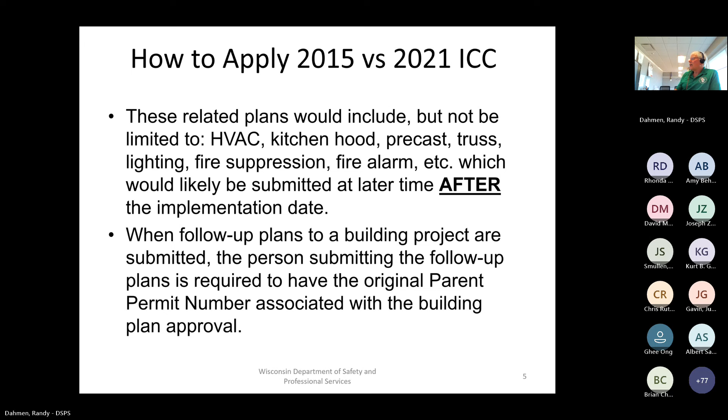I expect to see not only 1 hour, 2 hour, 3 hour, 4 hour fire ratings clearly identified, but also called out as fire partitions, fire barriers, and/or fire walls. Both need to be addressed. I can't tell you the number of plans I get that only give me a fire rated door schedule, and I'm supposed to guess the rest. You have to remember the HVAC guys have to use your plans, and they need to know how to penetrate the wall. When you don't tell them if it's a fire partition, a fire barrier, or fire wall, they don't know how to address that opening with their duct penetration. So make sure you've got complete plans.

So if the building plans were submitted prior to the implementation date for, say, a shell or spec building, and the building was completed - here's our box, it's just an empty box, got 4 walls and a ceiling, nothing in it, no tenant - and then at a later time, the building alteration plans are submitted to address the tenant build out, maybe 1 tenant, maybe 2 tenants, but after completion of the building, then the code applicable to that alteration is based on when the building alteration plans are received, not when the shell or spec building plans were submitted.

And again, when those tenant spaces are submitted, whenever that gets initiated with the building plan, all the ensuing HVAC, sprinkler, fire alarm, etc. plans would be based on the date of the building alteration plan when it was received. Note it's not when it was approved - I'll say again, it is not based on when the plan is approved, it's based on when it is received in its completion by the department. Don't give us paper napkins with doodles that you made a PDF on to get your foot in the door, because we're not going to accept that. We need complete plans submitted to the department, and when there's complete plans, that's when we'll identify it as acceptable under the code in which it was submitted.

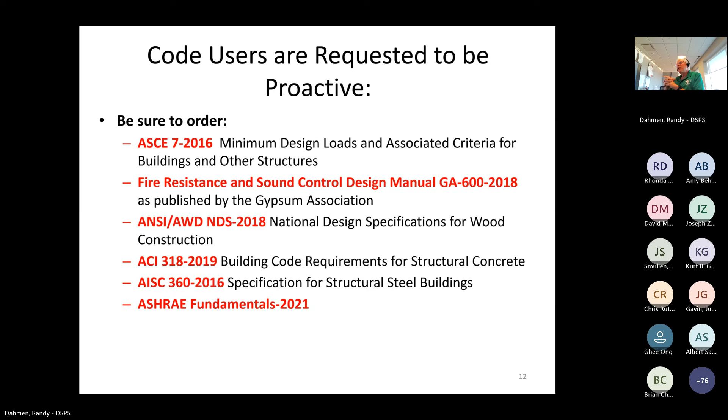Licenses. As part of this code adoption, we've incorporated new licenses, specifically to certify individuals for fire detection, prevention, and suppression inspection. Now, they're not a complete commercial building inspector, but rather they're only looking at three very specific areas: fire detection, prevention, and suppression inspector.

Now, these licenses, for the most part, will be ascertained by local fire officials who work for various fire departments, whether they're permanent or voluntary workers. As many of you may or may not know, the fire code, SPS Chapter 314, requires that yearly fire inspections take place in commercial buildings. This is where the fire department gets into buildings and verifies that the exit signs are working, that the fire suppression equipment has been properly checked along with the records that go with that, and that there hasn't been damage to the fire alarm system, etc.

But now there is a license to give them the ability to write orders on fire detection, prevention, and suppression systems, just like that of a commercial building inspector.

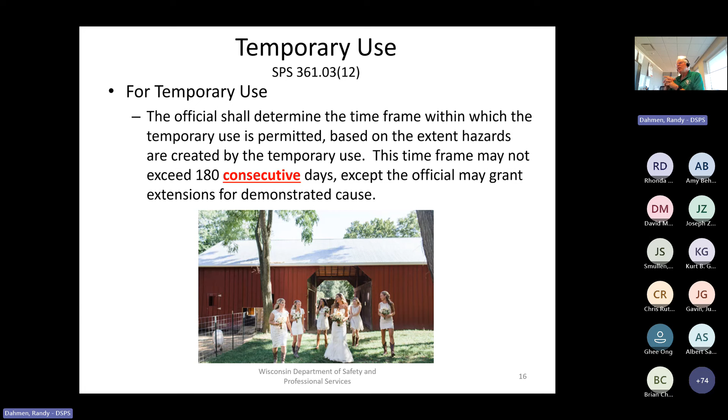So if you go to the building code, let's just say high piled combustible storage, that's IBC 413, and I know it's going to direct you to the International Fire Code. Before I go to the Fire Code and apply it, I go to the Fire Code, find out what chapters involve the application of high pile combustible storage.

Then I come to this section, and if that code chapter in the Fire Code is listed, I apply it. If it is not, I don't.

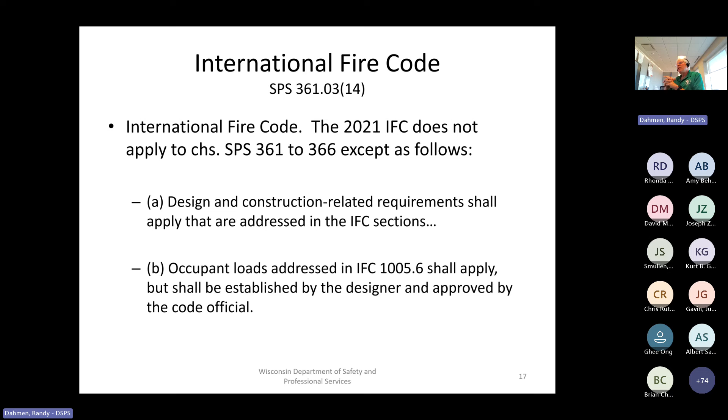We also have construction inspections and reports as addressed in the IFC, but note they may be performed or compiled by any qualified agency rather than by a special inspector. For instance, we don't have special licenses yet in the state of Wisconsin. So if you can show your competence in verification of concrete pour via slump tests and your abilities in having the testing equipment for welds and steel verification, you could be a viable agency or representative for performing construction inspections and reports. We'll have more on that later. The key here is that it doesn't necessarily have to have a license per se, but you do need to demonstrate competence and qualification.

The fourth item is use and operation provisions for the building. If the code sections or chapter sections of the IFC are listed, then you apply those sections as appropriate for your building design. There are global deletions throughout the code here as identified under parens 15 and G.

In general, I want to make clear the state of Wisconsin does not require occupancy permits. You can get into a state building or a county building and not have an occupancy permit per se. We don't issue them. On the other hand, local municipalities may choose by local ordinance to require the future tenant to obtain a certificate of occupancy. If that's part of their local ordinance, make sure you follow that and don't get in conflict with the locals.

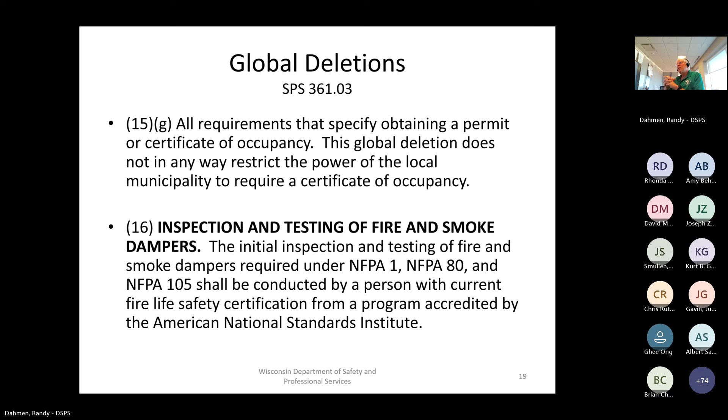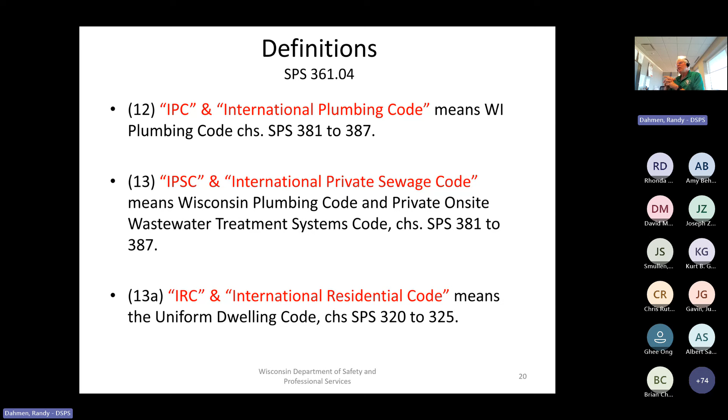Now there's some new definitions. Modular commercial building element means any modular commercial building, modular multifamily dwelling, modular commercial building system, modular multifamily dwelling system, and on it goes.

Formerly, the state of Wisconsin had two separate codes, the way the legislature had created their approvals. One was for commercial buildings and one was for multifamily dwellings. They were two completely independent codes. Many of you may remember the old Chapter 66, ILHR Chapter 66 or COM 66. The legislature combined those two, so now it's under one hat, and thus now we're just calling it a commercial building. And in updating the language of our code, we also updated some of the requirements, and we'll get into that shortly.

As I implied earlier, multifamily dwelling has a legislative definition, and thus we have to use their definition, not that of the International Building Code.

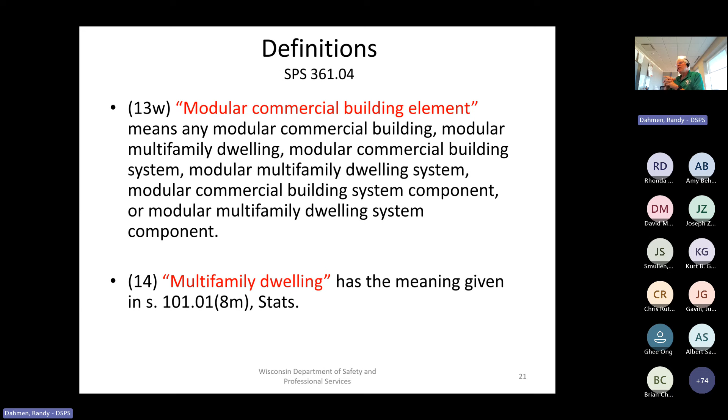Now, some changes were made to the plan review approval. They created a new exemption for single-story buildings and structures of less than 1,000 square feet located on individual parcels or lease sites at Wisconsin State Fair Park. This reference to Wisconsin State Fair Park is Milwaukee and Milwaukee only.

Permission to start, a PTS, many of you are familiar with. It allows you to get started early. I'm going to expand on this because a lot of people don't seem to understand the limitations of this permission to start. It is not an allowance to start anything you want at your discretion. It is only allowed for footings and foundations, i.e. construction at grade or below. That's it. Don't send in a permit to start for HVAC system alteration on the second floor or the installation of additional windows on the first floor. That is not what a permit to start is for, and if we know about it, we'll deny it. It is only for footings and foundations.

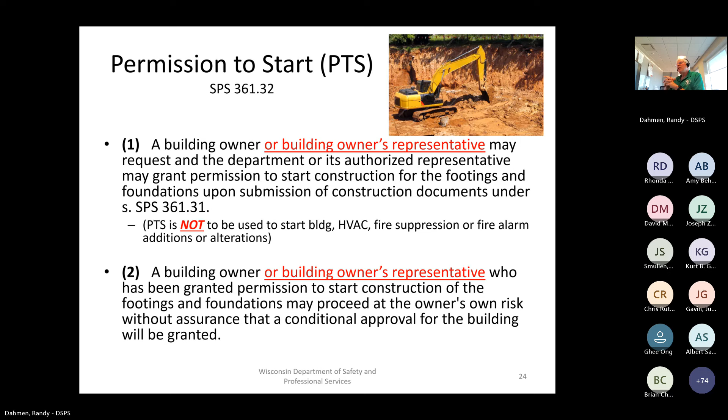This is one that I believe the design and contractor group should appreciate. We've changed the validity of an approved plan from 1 year to 2 years if it involves an alteration. So if you have an interior building alteration, you're going to move some walls, create some new rooms, spaces, conference areas, etc., that plan, instead of being good for 1 year, will be good for 2 years from the date of approval. Similarly, if you have alterations to HVAC, fire alarm, fire sprinkler, etc., you have a 2-year approval date for that alteration.

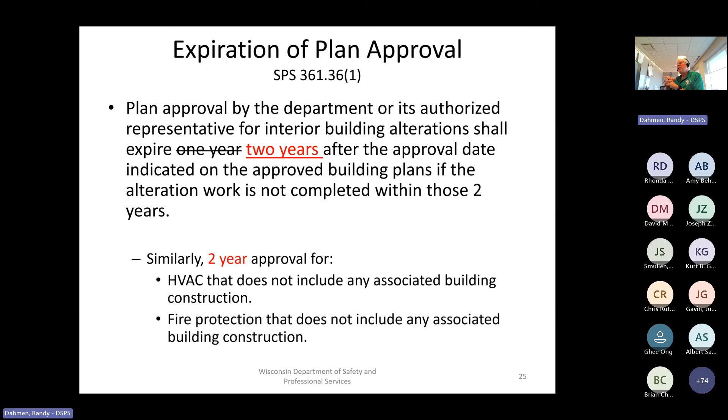Now, we talked about the modular commercial building elements and how we combine commercial buildings and multifamily and put them into one. If you're not familiar with the system, what they do, and there's a real advantage, is that they construct these modules, it looks like a box, in a factory where conditions are controlled. You don't have to worry about the wind, the rain, the snow falling, or being 20 below zero. It's built in a factory, thrown on an 18-wheeler, taken to the site. A crane lifts it up, puts it in place, and it's properly fastened. Basically, it's a modular commercial building. There's some advantages to that. Not saying that everybody has to do it - it's an option.

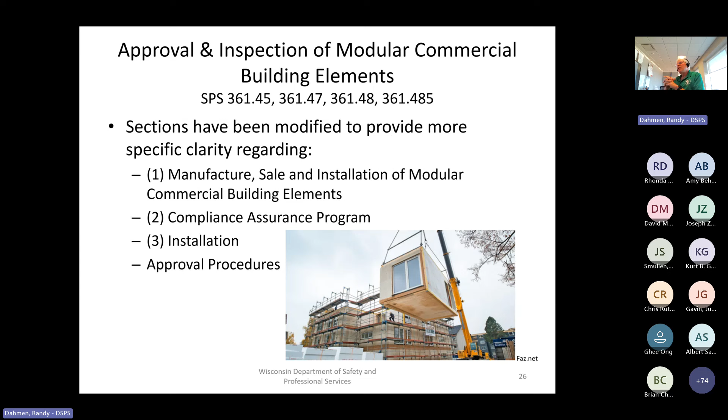And of course, when these boxes are constructed in a factory, we want to know that they're being constructed per the requirements of the code, because there's necessarily no on-site inspection by our inspector. So there are some requirements, a compliance assurance program, the manufacture, the sale, the installation, etc., that needs to be procured if this option is chosen.

Now, when we adopted the 2015 code, we incorporated the option for the design community, without a petition for variance, to use a newer version of the model codes. So in 2015, you could have used maybe the 2018, the 2021, or even the 2024 without a Wisconsin petition for variance being submitted and approved. However, you have to follow the published code as written - there are no Wisconsin amendments. If that's the choice you make, and you certainly can do that, know that there are no Wisconsin amendments that are applicable. I emphasize, Wisconsin amendments typically reduce the requirements of the code.

We clarified this situation as to what the fees would be through what is now parenthesis B, and the fees are to be subject to 302.51 for a new approval for an alternate standard, which is exempt from the petition for variance requirements. So as we go to 302.51, you'll see here's the new approval - it's an alternate standard, and thus the cost is $1,200.

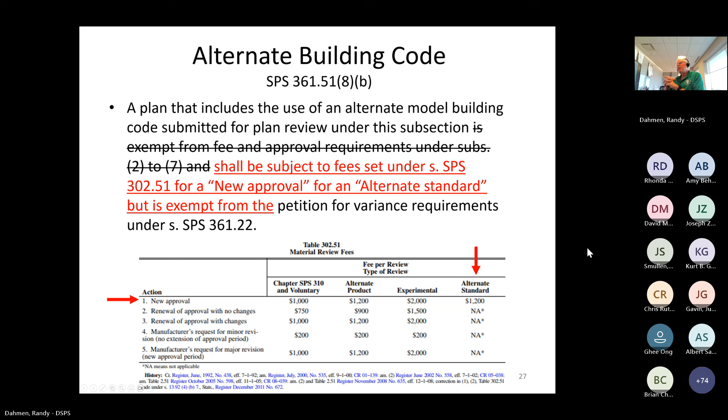Certified municipalities and counties have their own set of rules of what they can and cannot inspect and or review, depending on if they're just delegated or maybe a second class city, or even a first class city, such as the city of Milwaukee.

So an alteration to a space involving less than 100,000 cubic feet of volume is allowed to be reviewed by a local delegation. Now note, if I had a distribution building of 1.2 million square feet, if the alteration is 100,000 cubic feet or less, the locals can do it, even in that massive building, because it's considered small enough. We have some new definitions: fuel burning appliance, high pile combustible storage.

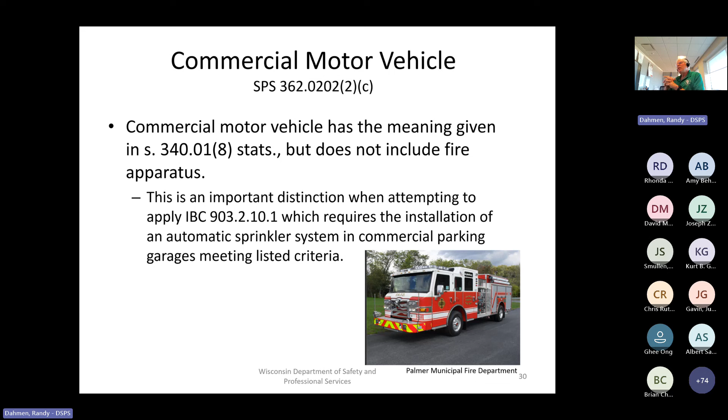Well, when you go to 903.2.10.1 in the building code, you'll find that a commercial parking garage that exceeds 5,000 feet for a fire area is required to be sprinklered. On the other hand, if you just have a general parking garage, the fire area can be as large as 48,000 feet before the need for sprinklering is triggered. So that's the reason for this definition, for clarity purposes.

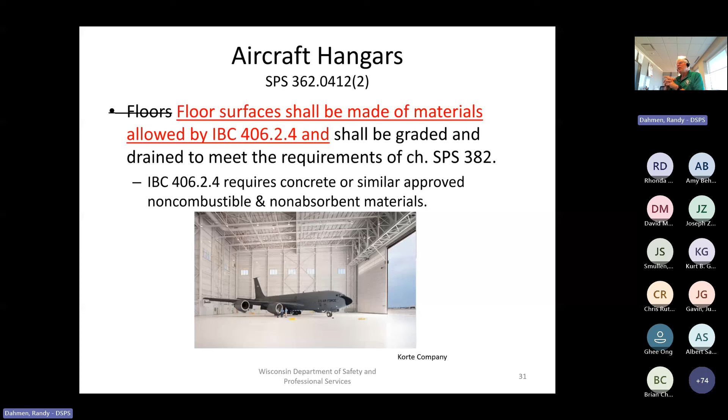Aircraft hangars: floor surfaces need to be made of materials as allowed by 406.2.4, and obviously that number doesn't mean a whole lot. In general, it just says the floor has to be concrete or other approved non-combustible, non-absorbent materials. We don't want gasoline sinking into the dirt, and we don't want cracked, loose materials where antifreeze goes into the soil and contaminates your well water. So this is just a clarification.

For those of you who get involved in those unique buildings I talked about, where instead of 3 tenants you might have 2—a commercial tenant space next to a single residential space—the building shell is commercial, the commercial space finish-out falls under the commercial code, but that single tenant, assuming it's residential, falls under the Uniform Dwelling Code. If that's the case, there needs to be a separation wall between the 2 tenants, and with this language it will be more restrictive as defined by the Commercial Building Code than that of the UDC. The Commercial Code now is going to require a complete 1-hour assembly.

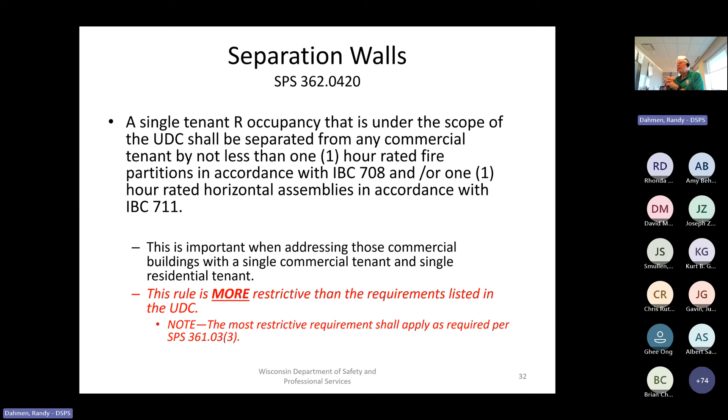If you read the UDC, they have a pseudo assembly—it's not a full 1-hour assembly. It's similar to it, but it's not recognized as a full 1-hour assembly. The Commercial Code will be more restrictive; it is the code that needs to be applied. You need to have a full 1-hour separation between tenant spaces under those unique conditions.

Firewalls, right? We want to separate buildings. We have one structure, but we're going to create 2 unique buildings for purposes of code enforcement. That's what a firewall does.

So there's different ways to address horizontal continuity. The most common way is to extend a 1-hour fire-rated assembly with a length of 4 feet in 2 directions on each side of the intersection of the firewall. The other option is to use an imaginary line at the firewall. What we've done is added to this, and we've now allowed the design community to extend the firewall 4 feet in any one direction. Let's take a look at that.

As we see here in the upper left, here's an exterior wall, here's an exterior wall, here's my firewall. It ends right at the corner. The first option is to extend 4 feet out with a 1-hour rated assembly, 4 feet in each direction. And if you poke a hole in it for whatever reason, whether it's a window or a door or something else, you need to have protection, 3/4 hour protection.

The second option is where you define an imaginary lot line. Now you can make this 15 degrees, 45, 65 - designers, you make it whatever you want. But basically what you're going to do is create an imaginary lot line, and depending on how far you are, table 705.8 is going to allow you certain limitations as far as openings, windows and doors.

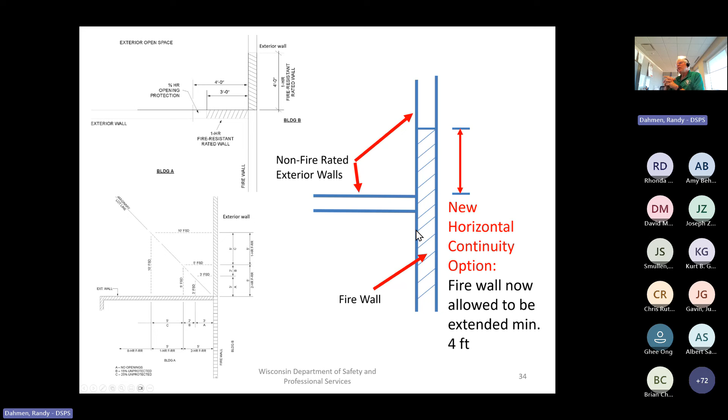But we as a department have allowed a 4-foot extension as shown here. Here's my firewall - it would have normally just ended right here where the intersection occurred. We're just going to extend the firewall out. So instead of a 1-hour scenario, if this is a 2-hour, 3-hour, 4-hour firewall, that same fire rating is going to extend 4 feet. So it's a new option. Like I said, we've approved it before, but now it's formalized.

For those on the HVAC side, we didn't adopt the International Residential Code, and because of this, this was kind of a round peg in a square hole. So if you had a townhouse consisting of 3 stories, say you had a basement and 2 or 3 stories above grade, and you put your furnace in the basement and extended your ducts within the dwelling unit 3 stories, under the current code it would say you need to have a fire rated shaft,

which doesn't make a whole lot of sense. So we've added language to address this. Now if you have an individual dwelling unit connecting up to 3 stories, you don't need to have a rated shaft, but you do have to protect the ductwork with non-combustible material that resists the free passage of flame and products of combustion.

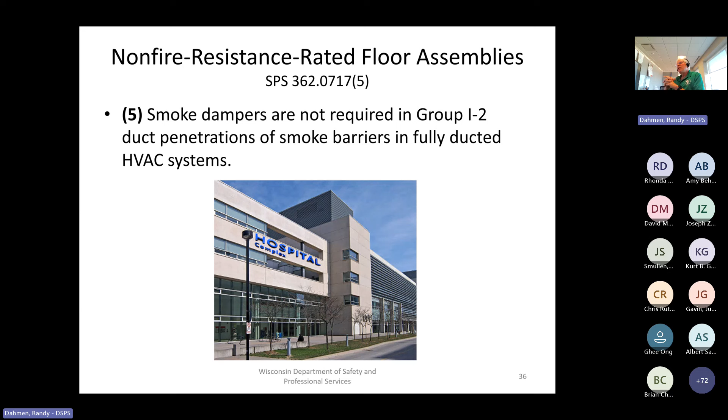For those of you involved with hospitals and/or nursing homes, smoke dampers are not required in Group I2 duct penetrations of smoke barriers in fully ducted HVAC systems. So another new requirement.

Sprinkling language for assemblies. Over the years, we've based a lot of changes and requirements for sprinklers on petitions for variance. We've input multiple means by which a sprinkler system is not required in certain building occupancies. This is an extension of that - we've tightened up the reins on some of it, and some of it we've extended. The point is the Wisconsin amendments allow a reduction in criterion for sprinklering on multiple building types and occupancy. So let's start in and see where it leads us.

We've changed some of the wording here, addressed under A1, A2, A3. A1 is theaters, assemblies. A2 is eating and drinking assemblies. A3 is general assembly. An assembly, by the way, is 50 or more people - if you're less than 50, by default it is a business occupancy. So let's take a look at the first one.

An automatic sprinkler system shall be provided where one of the following conditions exists, and the language has been changed. The fire area containing the A1, in this case theater, occupancy has no stories that include a level of exit discharge. So if you have that scenario, you need to sprinkler the building.

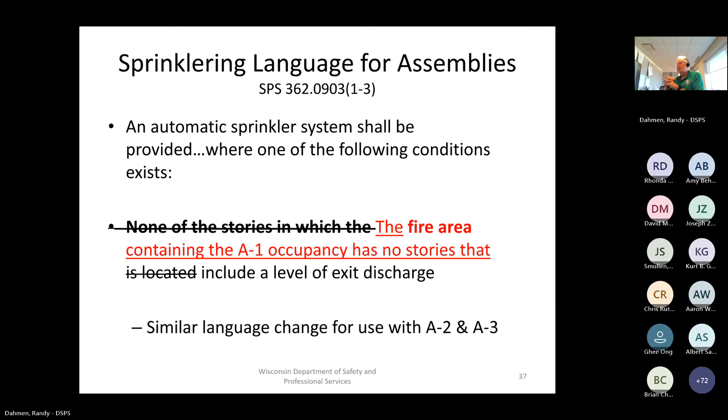Additional modifications to language: in the past, for schools K through 12, the threshold for sprinklering was a fire area of 20,000 square feet. That will now be reduced to 12,000 feet. So if you have an educational occupancy and the fire area is over 12,000, you need to sprinkle. The other trigger is that if the Group E fire area has an occupant load of 300 or more, either condition will trigger the need for sprinklering in an E occupancy.

This exception was already in the code; we're just changing one element of it, dealing with sprinkler systems on multifamily dwellings. In lieu of having a 13 or 13R system, the system can use a 13D domestic system, meaning there's no water pump—it comes right from your domestic water. This is allowed if you meet criteria 1, 2, and 3. Item 1 has changed: instead of allowing a 13D system for 20 dwelling units, it's now limited to 4 dwelling units. The other criteria haven't changed—the multifamily dwelling is not more than 2 stories, and the municipal water system is not available.

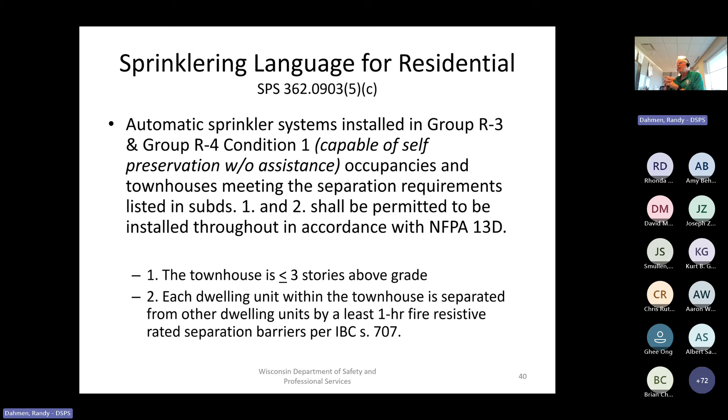So that's one of the modifications for sprinklering for the design community. Another involves automatic sprinkler systems installed in Group R3 and R4 Condition 1, which implies capable of self-preservation without assistance. R4 also addresses scenarios with greater than 5 but no greater than 16 occupants, involving townhouses meeting the separation requirements listed in 1 and 2, which shall be permitted to be installed throughout in accordance with NFPA 13D, as a substitute for a 13 or 13R system. The two criteria are that the townhouse is 3 or less stories above grade, and each dwelling unit is separated from others by at least a 1-hour fire-rated separation barrier.

Now this has been in the code, but I need to explain. Townhouses meeting the definition of IBC Chapter 2 and satisfying subdivisions 1 and 2 may be constructed without an automatic fire sprinkler system if the townhouse is less than 2 stories above grade and each dwelling unit is separated from others by at least a 2-hour fire-resistive rated separation wall constructed per 706, which is firewall construction. That separation wall does not have to comply with the structural stability requirements of IBC 706.2—in other words, you can allow the trusses to go across through this 2-hour wall assembly, unlike a normal firewall.

But before I continue, this is based on a state statute that is still in place—probably should be removed, depending on where you stand on that particular wall discussion. It's been in place for quite some time, allowing 2-hour separations in a residential building. If each unit is separated by 2 hours, the building does not need to be sprinklered.

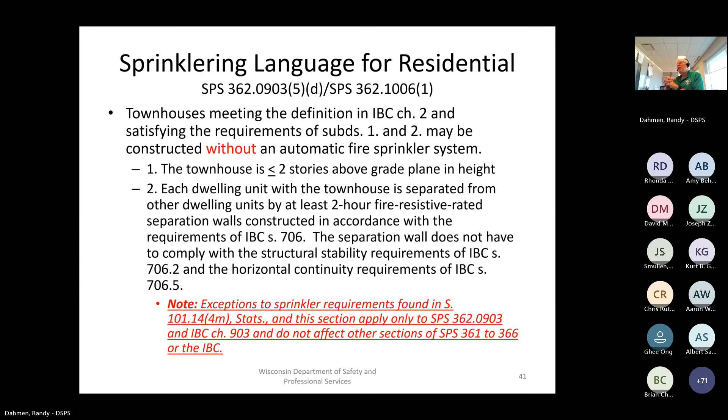This particular amendment was added at the suggestion of our sprinkler and fire alarm group, and it identifies what is expected for sprinkler protection on balconies, decks, etc., depending on the construction of the balcony and the type of construction of the main building. If the main building is type 3, 4, or 5 construction, they can apply 705.2.3.1 exception 3, which allows type 5 construction for the balcony. However, if the building is sprinklered—and I'm assuming this is likely residential, since it talks about patios of dwelling units—it then identifies how the sidewall sprinklers are to be installed for that balcony or deck area.

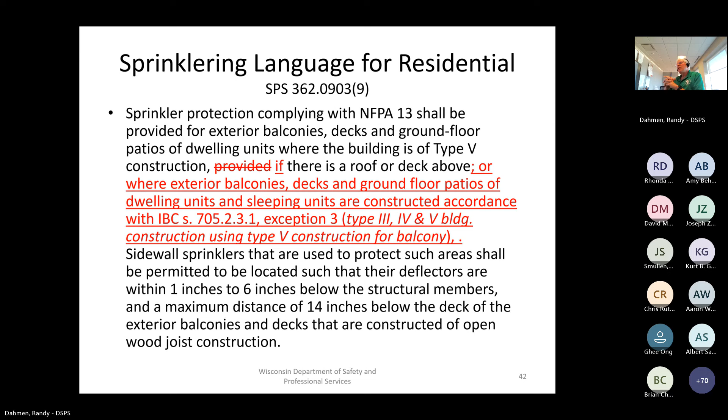Now, when we talk about municipal water system, the Department of Natural Resources has a definition of what is a municipal water system, found in NR 811.02. Typically a municipal water system is one located directly adjacent to or across the street from a property where the commercial building is located, and the property is able to be served by that municipal water system.

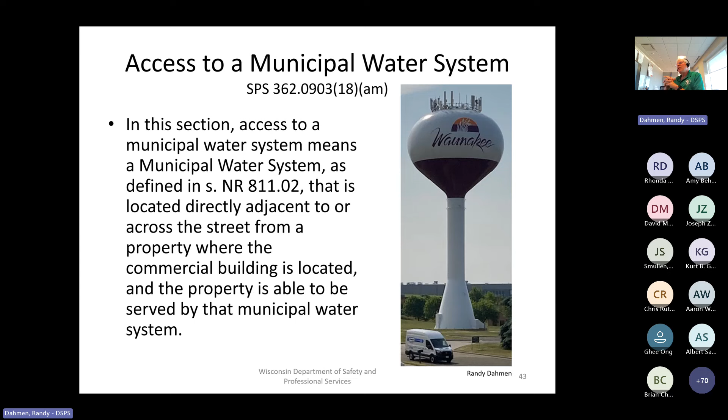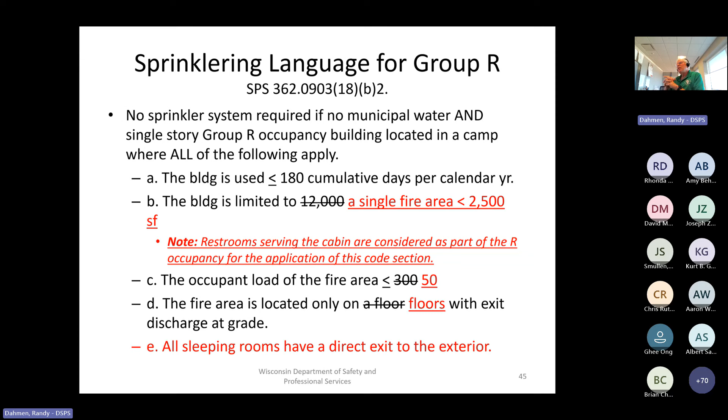So this does allow you to build a building, maybe a multi-story building, into a hill, where you would get to at grade on either story. Lastly, what was added is that all sleeping rooms have a direct exit to the exterior. In other words, if there's a fire, you've got a direct way out of the building. You don't have to go back through the building to get out.

Now, if you meet any of those items listed in the code under parens 18, such that you don't need to have sprinklers, maybe because of the lack of municipal water and you meet all the criterion, there are additional requirements that need to be facilitated. You need to identify the occupant load for the space.

All open flames, including smoking, shall be prohibited in the building and less than 50 feet from the building. In other words, don't have an open pit from the building, except flame equipment used to reheat or maintain food temperatures. Now, we've added language. It says in this section, open flame means a candle, solid fueled fireplace, or other similar flames. It does not refer to permanently installed listed fuel fired heating and cooking equipment that was installed in compliance with all applicable building codes at the time of installation.

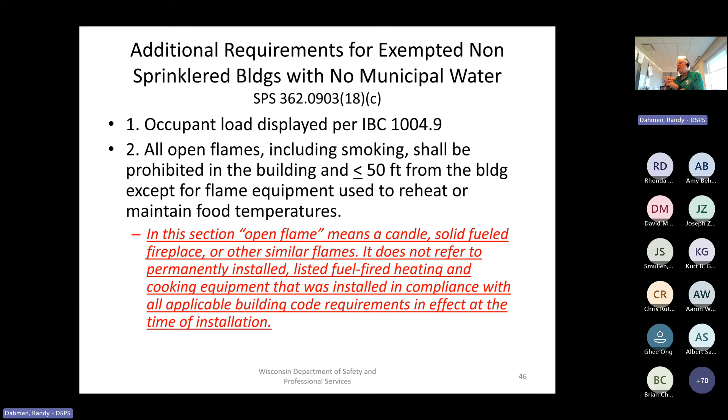Let's go back. Earlier, I talked about an A2 occupancy, which could be built without a sprinkler system, and as long as you met all the criteria, this is an additional requirement. So if that was a wedding facility, please note, you can't have candles, can't have a fireplace, okay? At any time. Not just because I built it today and the owner chose not to do it the first year, but he's got those beautiful candles out the second and third year. Don't do that.

Now that was for an A2, this is for residential. If you have a building that is exempted from being sprinklered, similar language applies: automatic detection is required in all interior spaces of the building, utilizing smoke detectors unless ambient conditions prohibit such installation. Where smoke detectors can't be utilized, you are required to use approved automatic heat detectors.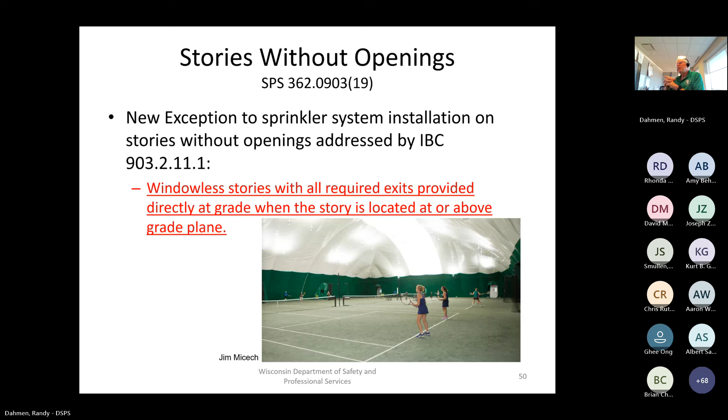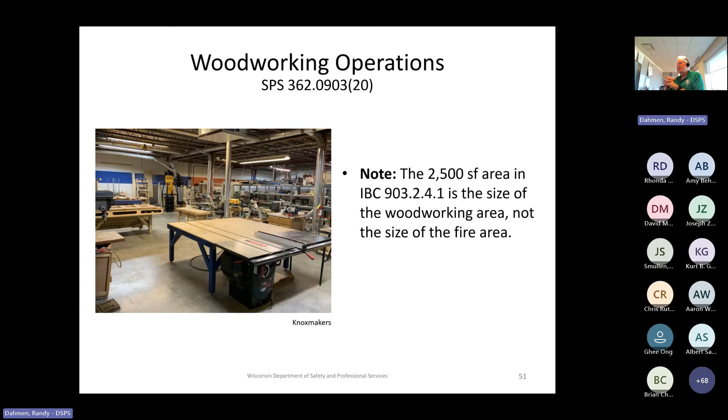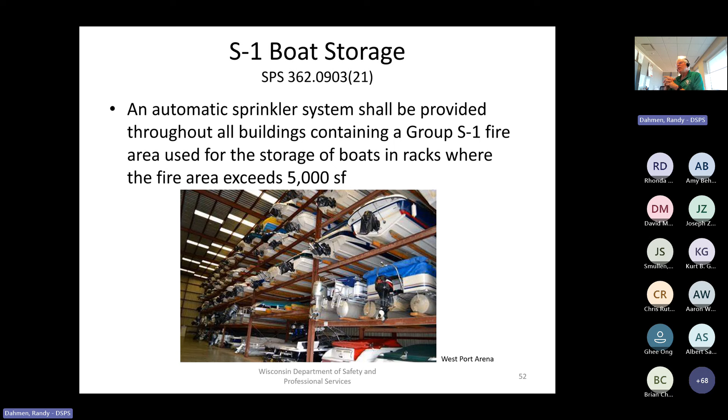Most boats consist of fiberglass and are thus very susceptible to flame should a fire event occur.

We did modify the S2 parking garage, and for condition 3, we placed in where the building area of the open parking garage, in accordance with IBC 406.5, exceeds 48,000 feet. This amendment addresses when a sprinkler system is to be installed. Typically, the code references the fire area, but in the state of Wisconsin, our definition of fire area does not include areas under a roof which are not enclosed. If this is an open parking garage, it's not enclosed, so that section of the code doesn't really fit with our definition. So we modified the language to identify 48,000 square feet rather than call it a fire area.

So, with that in mind, we need to know how to keep that area and the people working in those industries safe. What we've added is this amendment: when the provisions of chapters 361 to 366 require that a building or portion thereof be equipped with a sprinkler system, fire protection via a sprinkler system in buildings storing distilled spirits in wooden barrels or casks may be installed throughout the fire area containing this type of storage in accordance with an alternate design standard. In this case, the department's referencing Factory Mutual ignitable liquid storage in portable containers 7-29, based on the October 2020 edition.

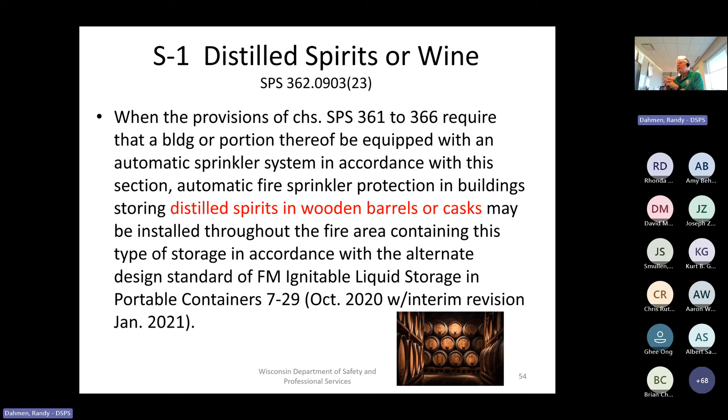So it provides the sprinkler community an alternative design option. The reason is this: NFPA 30, which is adopted through NFPA 13, a sprinkler standard, which is adopted through IBC 903.3.1.1, does not address within the scope of the standard the storage of wooden barrels and casks in these types of facilities. Thus the reason why FM 7-29 was adopted.

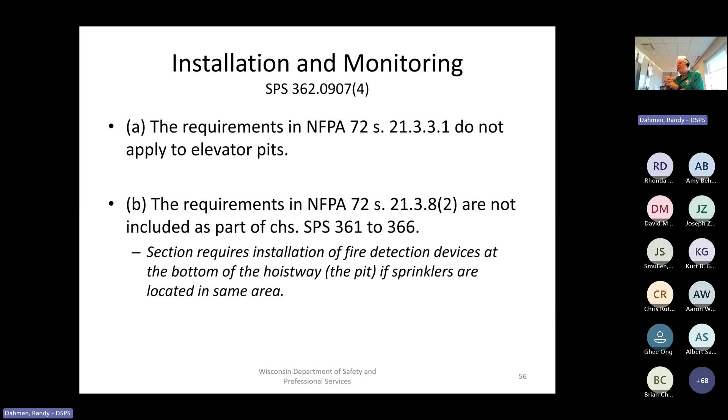For those of you involved in fire alarm systems, there's a couple caveats that were created to exempt the installation of a fire alarm fire detection system in the pit of hoistways. NFPA 72 has two sections that the department now is not going to require to be addressed.

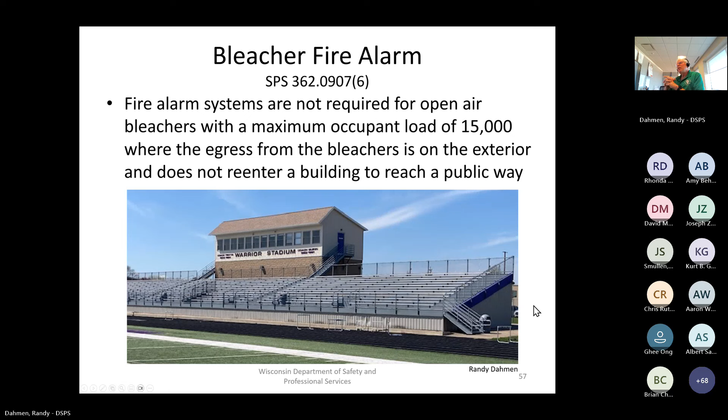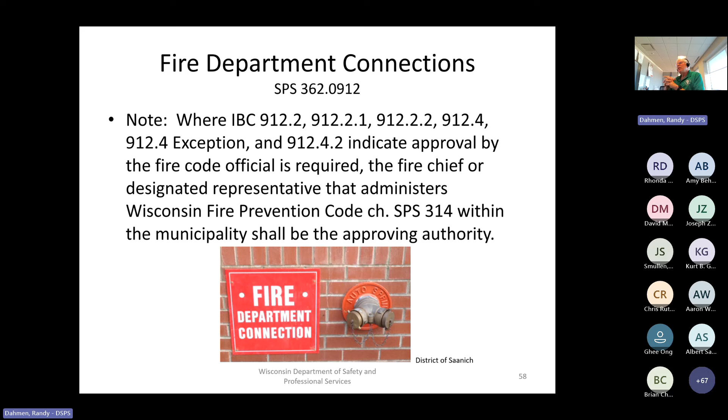When it talks about fire department connections and approval, these Wisconsin amendments direct those people who require those approvals to the local fire chief or designated representative for the local fire department who has jurisdiction with the Wisconsin Fire Code, SPS 314. They will do the approving, not us. Our plan review staff who perform review of fire alarms and fire sprinkler plans are not going to define or identify whether this is acceptable, because quite frankly, we don't know the equipment they have. They don't know if they have a 2024 water tanker or a 1954 tanker, which may have a completely different type of fire department connection. So work with the local official and find out what they need for your situation.

There are some new directives dealing with fire pumps, and one of the new exceptions is that fire pumps for automatic sprinkler systems installed in accordance with SPS 362.0903 are exempt. That particular code addresses NFPA 13D, and there is no fire pump applicable to a 13D system.

Second amendment in this section deals with water supply valves as required under 913 on a fire pump, where the fire pump supplies either an automatic fire sprinkler system, a standpipe system, or both. It identifies that they have to be monitored.

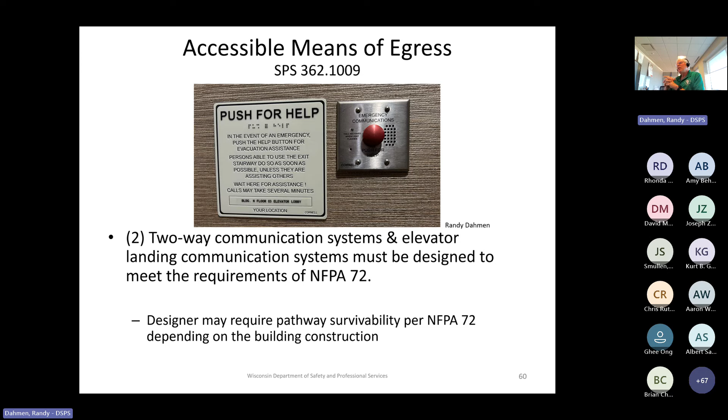Those of you who design buildings with an elevator know that you need a two-way communication system. We've now clarified through the new amendment that that communication system needs to be designed per NFPA 72. As a reminder, those of you involved in the design of these types of systems may be required to address pathway survivability, and if that's the case, you'll have to address it accordingly.

Stairways, always a troublesome issue. A lot of people get hurt on them, a lot of lawyers all over keeping their eyes on stairways. As shown here, we have a platform lift, many will call it a chair lift, placed on a stairway. I want to make it clear that this is not an acceptable means of egress in a building. Many times where this might come into play is an existing building where they can't afford to put a $150,000 elevator in, but they may be able to provide this chairlift on the stairway to provide better means of egress for those who may need additional accessibility.

When this occurs, when you add a chair like this, it obviously takes up space. What was a stairway, we don't know exactly where the wall is, but we've infringed on the width of the stair. And if this is a required exit means, we have to maintain the minimum width of the stair. So you can't just put willy-nilly chair lifts anywhere you want. It has to be a stairwell wide enough that adding this chair doesn't impinge on the minimum required width.

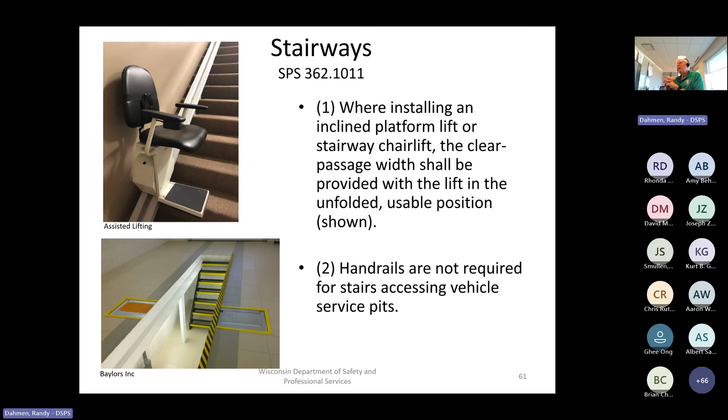We've identified now that egress can't pass through kitchens, storage rooms, closets, bathrooms, and other rooms where privacy is expected, or spaces used for similar purposes. It's been pointed out to me that this is an exit, and of course there are all kinds of things in the way here, which is another whole discussion.

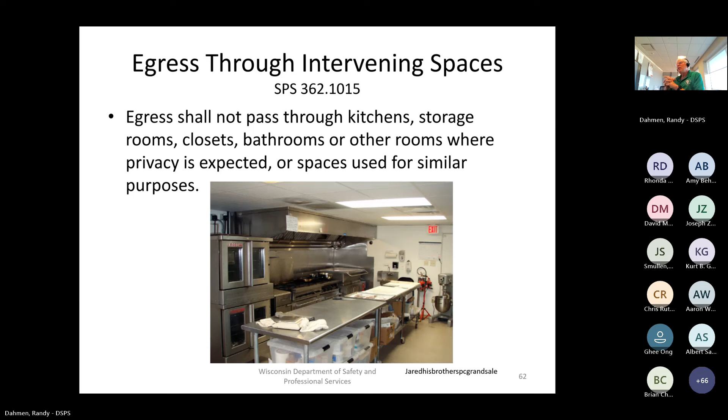Corridor continuity. Many of you have gone to hospitals or clinics where you have a very long corridor, and maybe you have a bump out where there's a couch, a television, maybe a work table, etc. It's a bump out, but it's part of the corridor. So in order to address that, we call upon the corridor continuity requirements of the code.

Specifically, other spaces or rooms constructed as required for corridors, and that are adjacent to fire-rated corridors, may not be construed as intervening rooms, and may be open to the corridor when all of the following are satisfied. The spaces can't be used for hazardous use - that seems pretty straightforward. The spaces are not occupied for incidental uses as identified in what is now Table 509.1. The spaces are arranged so as to not obstruct access to the required exit. So really there's been no change except for this fourth one.

If you had a room with simply a door on a wall going into it - let's just call it an archway - and if you had no door, that would be considered continuity from the corridor. But in order now to address it as corridor continuity, the shared wall needs to have at least 50% open to the corridor. So that adjacent wall between the room or space and the corridor has to have at least 50% of the wall open to the corridor. Failing that, we'll consider that a separate room.

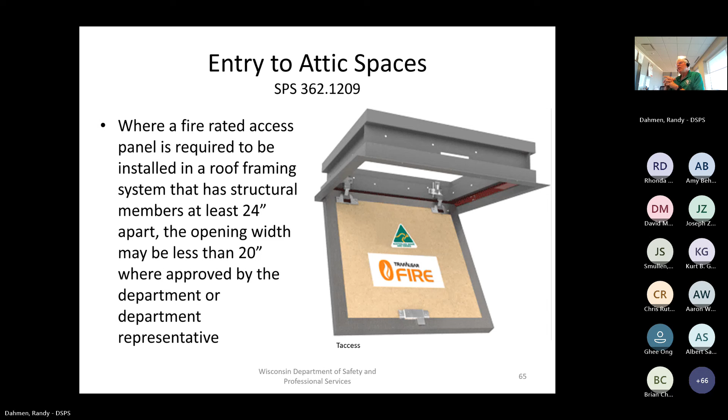Now, we were talking about toilets and bathrooms. A toilet room shall contain a lavatory and a water closet. Lavatory means sink. Water closet could be a urinal, a toilet, or some kind of enclosure.

I want to point out that schools are probably our most problematic area. You need lavs and water closets as required by code, and the language has not changed. Specifically, SPS 362.29022A states at least one lavatory shall be provided in each toilet room. So there's your first requirement: every toilet room has a sink.

Or in a gender-designated lounge adjacent to the toilet room. In other words, if you have toilets for men and toilets for women, you can't put all your sinks in the outside open area. You need at least one in the gendered area. If you need 4 lavs for the men and 4 for the women, you have to place at least one in the gendered area. You can take the other 3 for the men and 3 for the women, that gives you 6, and put them in an open area. That's perfectly legitimate.

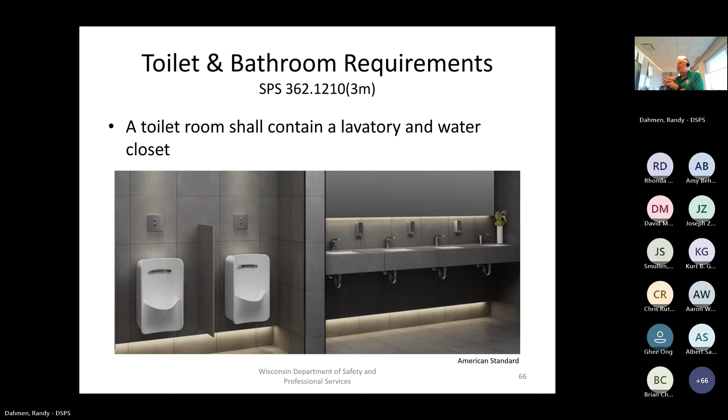Designers, especially those involved with colleges, collegiate buildings, and educational buildings, please be aware of this limitation.

Special inspections. As has been the case since our adoption of the ICC codes on July 1st of 2002, we have not required the special inspection section, Chapter 17 of the International Building Code. Now, with the adoption of the 2021 code, ladies and gentlemen, we are adopting Chapter 17.

Now, what does that mean? Well, it depends. It may need additional actions on behalf of the supervising professional, or it may not, depending on the occupancy, the type of building, and in many cases the location of the building. So a lot of things in flux here.

This section requires that the supervising professional or designer identify third parties to perform the required duties. Now, I'm going to clarify right here, right now: third parties may not be the designer of record or an on-site contractor. There's an exception, we'll get to that in a bit.

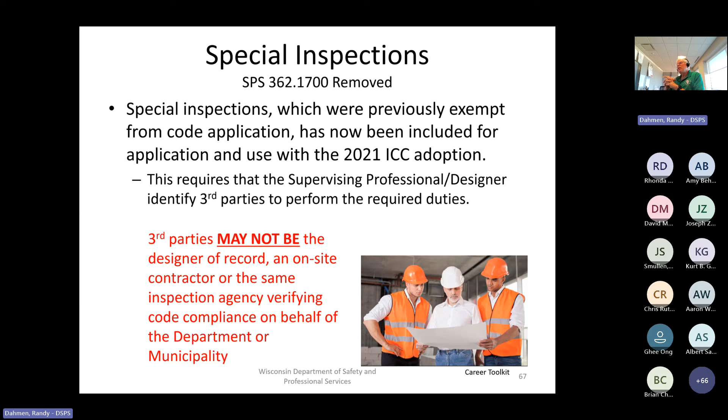Or the same inspection agency verifying code compliance on behalf of the department or municipality. In other words, if XYZ performs the building inspection on behalf of Madison, XYZ may not also participate in the special inspections. It needs to be an independent third party.

These special inspections require an agency to provide proof of being independent, objective, and competent, having the proper equipment and adequate personnel to perform the duties associated with special inspections and testing. Please note, we don't have all of the licensing typically referenced by the ICC in place in Wisconsin yet. So it'll be up to the supervising professional to find an appropriate, independent, objective, competent person to do the testing.

Also note, the building official is required to determine if the agency is acceptable. The fact that the supervising professional throws something the building official's way doesn't mean it's said and done. If the building official says that person has no clue, or lacks experience, or has been doing concrete all his life, so what's he doing structural design on steel, the building official is required to determine if the agency is acceptable based on the criteria and provide documented conditional approval.

In other words, it is up to the professional to provide all of the special inspection reports to the building official. The building official will not be performing that; it needs to be done by a third party. It is the designer and owner's responsibility to address all of them prior to, for instance, the issuing of an occupancy permit. Now, how do you track that? Well, there are some requirements for the methods of record file storage stipulated in this code section.

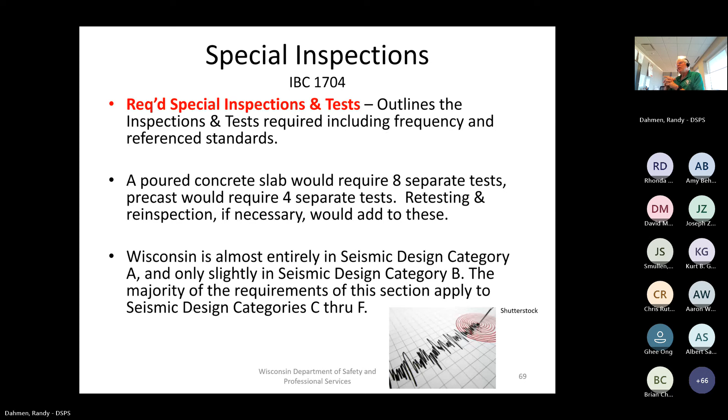The vast majority of the state is seismic design A, which for the most part exempts a lot of the special inspections. So feel a bit of relief in that.

Now, I had mentioned a little bit about contractors not being allowed to be a third party. Let's discuss that a little bit. The owner or owner's authorized agent, other than the contractor, shall employ one or more approved agencies to provide special inspections and tests during construction as required by IBC 1705.

Approved agencies are to be identified to the building official. The building official will tell you if that individual is acceptable or not, or maybe he needs more information. What kind of licensing? Do you have an engineer on staff? Who's your representative? Who's my contact person? What jobs have you done to justify that you're adequate and have the experience and knowledge to perform this testing? Those are legitimate questions. It's almost like a resume of sorts.

Now, there are some exceptions. One of them is construction minor in nature. Of course, everybody's going, well, what's that? What's minor in nature? Well, we're working on that. As with anything, especially when you're dealing with new code—I've been here 30 years, there's never been a code put in place that all the answers are in place. This is no exception, and this is one of the items that the department's going to be taking action on and providing greater guidance.

But it is an exception, construction minor in nature, and if that's minor in nature construction, you won't need to take on these special inspections. Some additional exceptions include U occupancies related to residential, cold form steel light frame construction per IBC 2211, or conventional wood light frame construction per 2308.

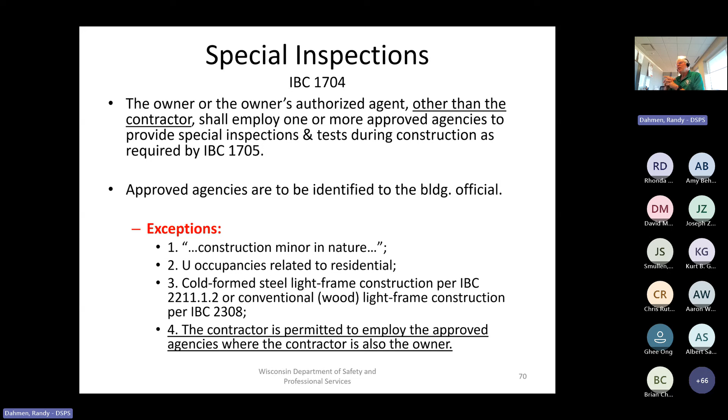Again, special inspections under 1705 establishes thresholds for requiring special inspections and tests, which include exceptions for construction of a minor in nature. Again, don't have all the answers on this, we'll be working on it, we'll be providing it to you. Keep your eyes open, be attendant to the multiple trainings that'll be coming up and discussions. We will have something out on minor in nature going forward.

Basically, this particular section establishes the qualifications for the special inspector as well as the content and format requirements for reports, which are required to be vetted and collected by the building official. Please note, the building official is not performing the inspections. It's done by a third party. He's just going to collect the results.

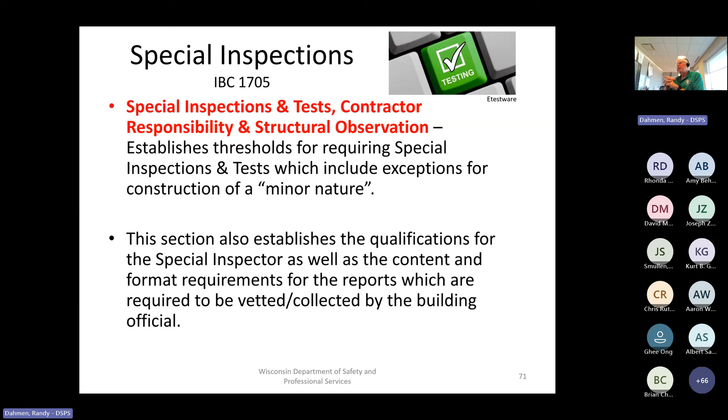All of them. Of course, then the next question is, what kind of tests? Well, there's multiple tests out there, and you can see here I've tried to address several that I found in the code. This is not necessarily a complete list, but you can see we got concrete, welding, masonry, glass masonry, milk glass if you will, wood, precast, mass timber, cast, helical foundations, cold form steel, light frame construction, structural steel, sprayed fire-resistant materials, floor and roof wall assemblies, bond strengths, mastics and intumescent fire-resistant coatings, EIFS materials, and smoke control systems.

And for those who are involved in the pre-construction load tests, they would be looking at deflections, wall and partition assemblies, exterior window and door assemblies, skylights, and sloped glazing assemblies. And again, under various circumstances, not necessarily all.

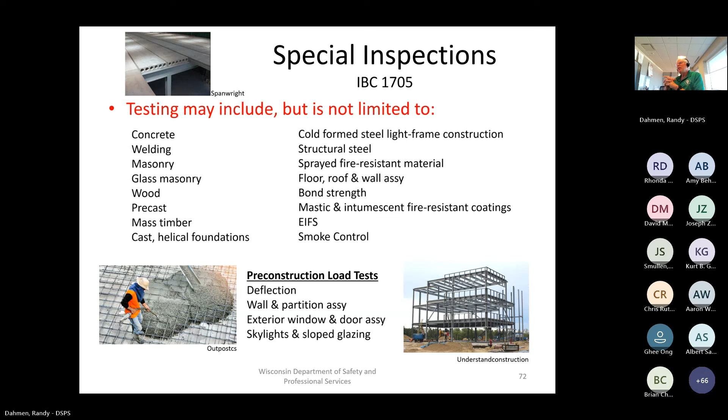So I do want to point out the special inspections is new to the state of Wisconsin. It's going to be new to all of us. There's going to be a learning curve. We are working with individuals from the state of Minnesota, which already requires this. They do have some materials that they're providing to the state of Wisconsin.

Design professionals, I want to inform you that you need to have on the plans identification of what inspections shall be required for your building. That way, there's no questions as to what the expectations are. So again, I will say the design community shall include on the building plans identification of the various inspections required for their particular building constructed under the 2021 I-codes.

Failing that, the plans will be held, providing another learning opportunity.

Moving on, there is some criterion for addressing load-bearing values of soils. We've made an amendment, footnote C, values to be multiplied by 0.5 for saturated soils.

We've added saturated soil as evidenced by the presence of redoximorphic features or other information. I have to admit it, I didn't know what redoximorphic was, so I looked it up. And it's the reduction and oxidation chemical reaction and the resulting appearance or morphology of the soil horizon.

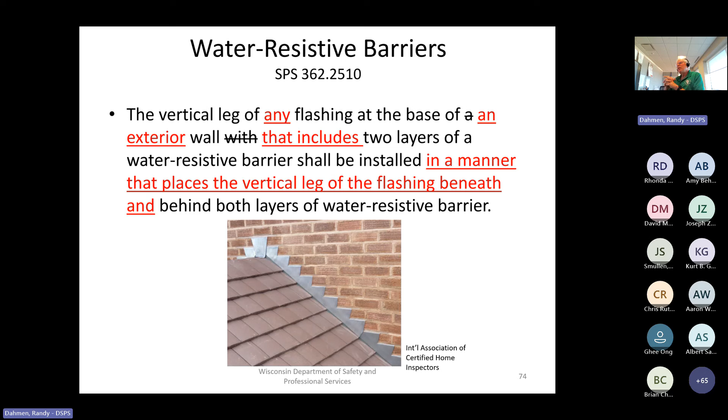Drinking fountains. We've allowed in the past reasonable alternatives to, say, a water fountain, a bubbler, et cetera, depending on where you are in the state. So we just clarified this and added examples such as bottle fillers.

If you got a big 5-gallon bottle, usually you flip it over, right? You've seen those, and they've usually got cups nearby.

I've seen bottled water. For instance, I had my car repaired. There's a refrigerator located on a small table where I can open it up and grab a bottled water. I have my handicap accessible clearance in front of the refrigerator, and my reach height is correct for accessibility. So you certainly can put bottled water just out on the table, or in a refrigerator, as long as it's made in an accessible manner.

And of course, bar service.

Some fixture calculations - exception 2, involving the use of facilities designed to serve all genders, was not included as part of this code. Examples and applications of this rule are outlined in the state statute, so we could not overcome state statutes. It's a rule that's in place.

An item of unique discussion: the required public facilities must be provided on site or an adjacent site under the same ownership. And this came about due to some plans that were directed to the department for review.

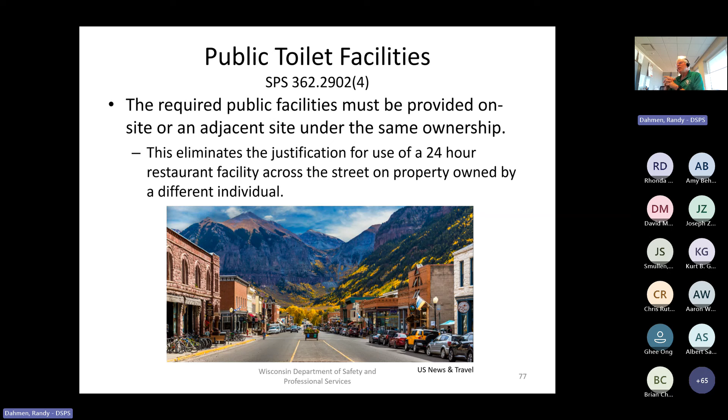Restroom equality. I took this picture when I was doing national qualifiers, and of course the bathrooms were well used and had very long lines.

And in the state of Wisconsin, we have a very unique rule, and we call it internally here potty parity. You won't find that listed in the code, and you won't find it in state statutes, but that's how we address it internally. Here's potty parity.

And in the statutes, it says public facilities which meet the requirement of 101.128, 3, and 4 - basically an assembly of over 500 people - must provide a sufficient number of toilets and fixtures to ensure women have a speed of access equal to that of men at the maximum capacity under 101.128.

Now, in the state of Wisconsin, because of that statute, we do have rules that address this scenario. And in fact, it's found in 362.2902, parens 1, parens D.

And wherever more than 500 people congregate, and more than the required minimum number of toilet fixtures or water closets and urinals are provided for males, twice as many of those additional toilet facilities shall be provided for females.

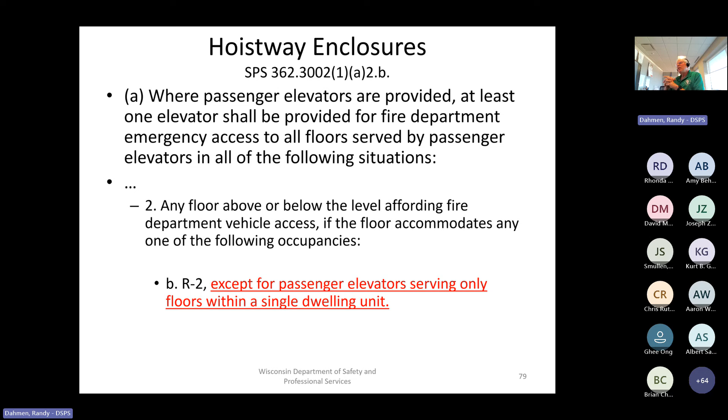We needed to have fire department emergency access to all floors in an R2, and that's correct. However, what we didn't say is that there's an exception if that passenger elevator is serving only floors within a single dwelling unit, and we've now included that language into the code. It's a very special circumstance.

Looking at the appendix, we've modified the provisions applicable to the commercial building code here in Wisconsin, such that we've added M and O to the building code.

Changing codes now. We were in the building code, we're going to change hats, we're going to go to the energy conservation code.

This is 363, and exterior design temperatures and cooling temperatures are specified prescriptively under 363.0302, or as you can see here now, it's been added that you can use ASHRAE 90.1 2019.

Please note, we want a cut sheet for the location within the state where you are using those design temperatures. Don't simply just put them on your plan. We want a cut sheet identifying where you're finding that, so we know the reference if you choose not to use table 363.0302. Building envelope.

Many of the items that many of you were familiar with, the use of the IECC 2009 on multiple Wisconsin amendments, those are all gone. All those amendments are gone. The vast majority of the amendments that formerly were with the Energy Code are gone. There are very few amendments in the Energy Code.

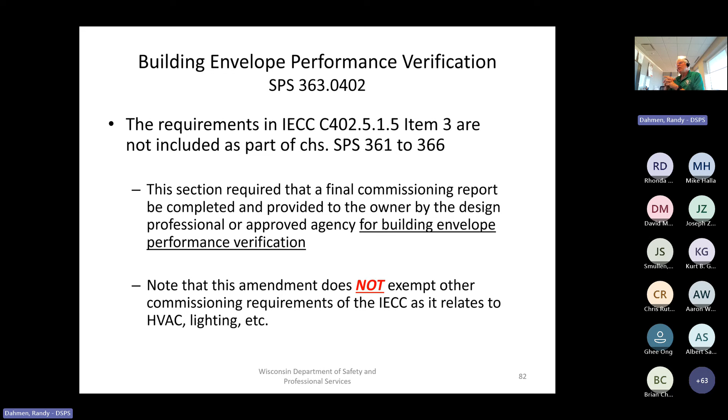Now, many of you know the current code does not require any commissioning of any sort, assuming you stay with the IECC as written. But if you choose to go to the ASHRAE 90.1 2013 edition, you would have been required to commission as per that standard. In the adoption of the 2021 International Energy Conservation Code, commissioning is required unless an exception is listed, and this is an exception specific to building envelope.

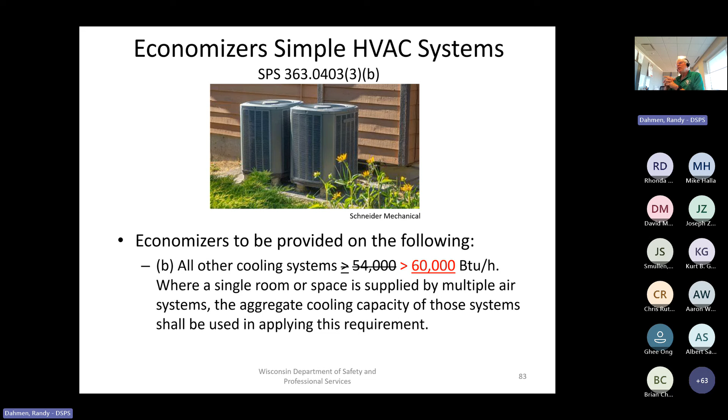We've now changed the economizer threshold for split systems involving cooling which are greater than 60,000 BTU. So if they're 60,000 BTU or less, about 5 tons, they don't need an economizer. If you're over 60,000 and it's a split system cooling, then you do need an economizer. Please note all rooftop units, just as before, were always required, if they had cooling, to have an economizer installed. That hasn't changed.

With those cooling system installations, if you have a rooftop type unit, fault detection and diagnostics are a requirement of the code, just as they were at the 2015, although we did delete some actions. Note that there's no need to sample the HVAC system's performance at least once every 15 minutes. There's no need to automatically identify and report HVAC system faults, and there's no requirement to automatically notify authorized personnel of identified HVAC system faults.

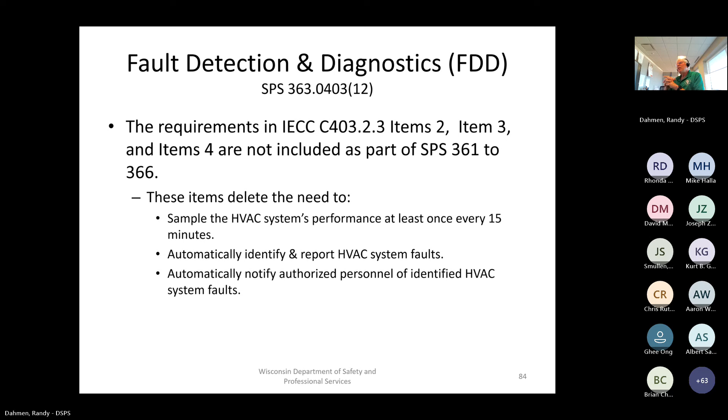We did a clarification on where insulation and what type of insulation is required. We've added a note that for the purpose of determining insulation requirements, ductwork located outside of the building envelope is considered to be located outside the building. This is key for ducts above the insulation in an attic. So as many of us know, if you have a house, for example, let's assume it's an office building, it's wood frame with wood trusses up there. The ductwork could go above the ceiling and be outside of the envelope, in that interstitial space above the insulation where the truss chord is, but yet within and underneath the roof.

For code purposes, we've now identified that if it's outside the envelope - in other words, the envelope is where the insulation is, typically on the exterior walls and in the ceiling, and in this case, if it's a truss roof, it's going to be along the chords lying on top of gypsum board - if the ductwork goes above that, that's considered to be outside the building. Now again, I understand it's still within the attic, but this direction is to say you need R12 insulation if that ductwork is exposed outside the envelope.

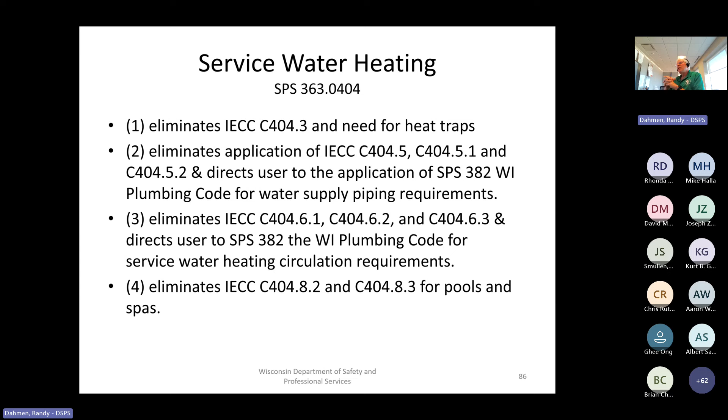A major point of discussion for building designers and heating designers, electrical designers, because guess what? All of you need to work together. You got to talk. Design build needs to talk. Did I say design build? Let me say that again. Design build needs to talk.

This section, which was formerly exempted due to the Wisconsin Amendment, is now in play. The amendment is gone. Additional efficiency requirements are now part of the code. It adds another 10 to 20% efficiency to each and every commercial building. The intent of this section is to improve the efficiency of the building, giving the designer some options as to where they might take those efficiencies.

The point of the section is to achieve a total of 10 credits based on table C406.1(1) through (5). Building designers, you must - notice I'm not giving any wiggle room here - it needs to be on the plan. If not, we'll hold the plan and provide you a learning experience. You need to have on the plan the means by which the credits are to be attained so that we can verify what it is that's supposed to be performed in the field. Don't send us plans and not include these requirements because we won't approve them. We need to know what that is.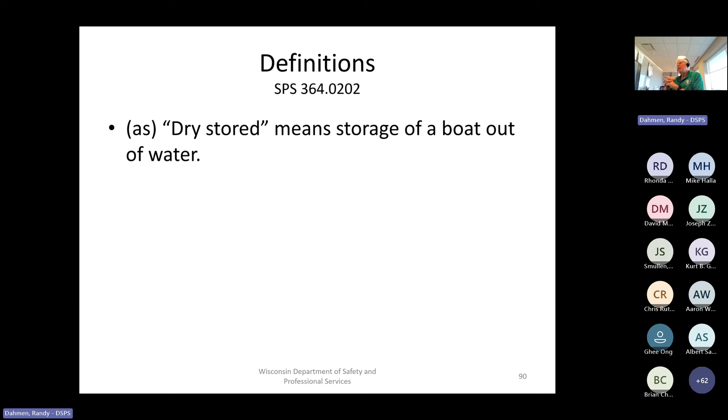We do have a new definition in the mechanical code. We're switching to the mechanical code. What is dry stored? So when we talked about boat storage earlier in the building code, dry stored for purposes of mechanical code is a boat out of water and its storage.

Those of you involved in healthcare facilities, specifically through the application of the rules adopted by the Department of Health Services here in Wisconsin, you'll see that the baseline reference for healthcare facilities is now the ANSI ASHRAE Standard 170, 2017, ventilation of healthcare facilities. Note that in both sections, 364.0300 as well as 364.0309, which deals with temperatures, it's the same reference. You're going to be using the same standard.

We did modify the means of activation and sequencing. In the past, we've always required natatoriums, or pool areas, to have continuous exhaust. Well, no one's going to drain the pool at night and fill it up first thing in the morning. They're going to leave the pool full of water. Thus, the exhaust ventilation needs to be continuous, whether there's people in the space or not.

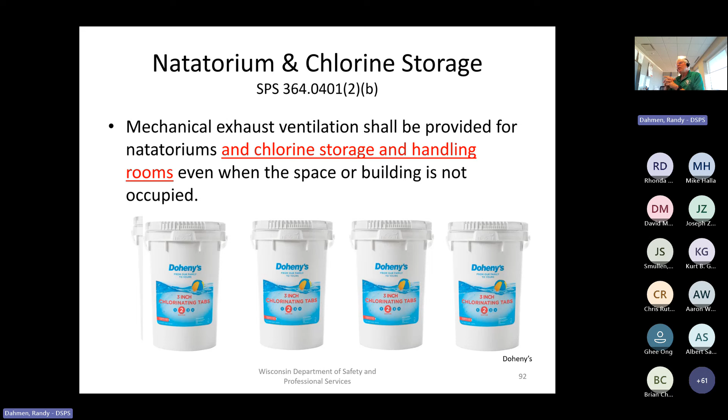Given that concept, we've taken it one step further and added chlorine storage and handling rooms, in order to ensure that the chlorine doesn't build up. We've noted in several buildings where chlorine is retained in these spaces that there's excessive rusting, and it affects some of the structural members of the building if they're exposed in that storage space. So in addition to pools, now chlorine storage and handling rooms require continuous ventilation.

We did modify the table for natural ventilation. Some of you may appreciate it. Office spaces, which typically have not been recognized for natural ventilation in the past, now will be recognized if the office space is less than 300 square feet. So if you have natural openings such as openable windows, openable swinging doors, and they add up to at least 4% of the floor area openable on the wall, then you will have met the natural ventilation requirements. This is specific to office spaces less than 300 square feet. If you're over 300 feet, you can't use natural ventilation. You must have mechanical ventilation with outside air and appropriate air change.

We did get rid of discos, not many discos going on right now, so we updated the language. We also added a new requirement related to ice arenas without combustion engines, where you have less than 100 persons. And you kind of scratch your head, you go, well where's that? Well first off, let's talk about ice arenas, hockey arenas, figure skating arenas. That's what we're talking about.

Many of you have seen the vehicle. If you've ever gone to a hockey game or figure skating rink, you'll see that they have to redo the ice because it gets all chipped up. And they use a vehicle that many people are familiar with. It's called a Zamboni. It drives onto the ice, picks up all the chips, and lays another layer of water down, which adheres to the existing ice and freezes into place.

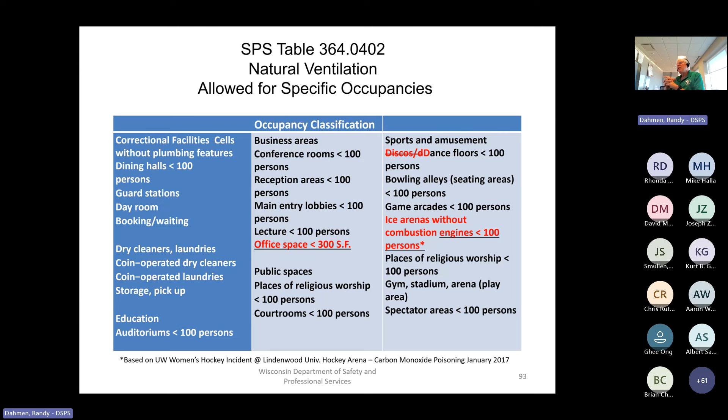Now, in follow-up to that, as we go to Table 3640403, we did tweak the mechanical requirements to match the national requirements. So what was 100 CFM intermittent mechanical exhaust, which could be controlled with a toggle switch on the wall—you can still use that. The other option was to have 20 CFM continuous; well, that's no longer the case. At the national level they require 25 CFM, so we modified our code to complement that which is in the International Mechanical Code.

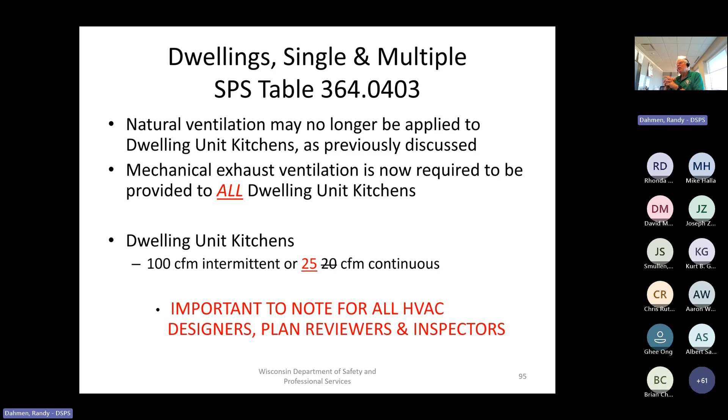So, just to reiterate, if you have a dwelling unit or guest room with a kitchen, you cannot use natural ventilation—you must have mechanical ventilation. The mechanical ventilation shall include either 100 CFM intermittent exhaust—this could be a ceiling exhaust fan, a range hood, or doesn't have to be, could be a sidewall exhaust fan—but it has to be located in the kitchen, operated by a switch. It's either 100 CFM intermittent, or if you choose to go continuous, then you don't need a switch, it just needs to be continuous. Typically the continuous exhausts are intertwined with an air-to-air heat exchanger. This is an important point for the design community, contracting community, inspectors, plan reviewers, designers—it's a big issue.

Another issue of importance is corridors—in the past they were considered non-occupied spaces, so we did not require ventilation in a corridor. That has changed; we now require 7.5 CFM of outside air per 100 square feet of corridor.

So residential buildings are probably the most obvious, but even office buildings now require ventilation. Now, if it's a non-fire-rated corridor, it's really not a big deal in my opinion—yes there's a little bit of additional ductwork, etc., but not a big deal. But if you have a fire-rated corridor, building designers and HVAC designers need to be careful, because you need to have fire and smoke dampers at every penetration to the corridor enclosure. Fire-rated corridor enclosures penetrated by a duct require fire and smoke dampers, unless you meet an exception in the code.

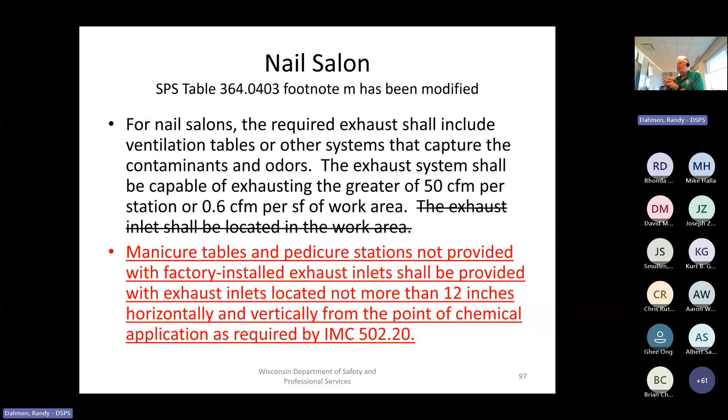Nail salons in the past—the code has had requirements. We softened them up and said the exhaust inlet can be located in the work area, could be in the ceiling or on the wall—the exhaust could be anywhere in the nail salon. With the adoption of the 2021 code, this language has been removed, and now IMC 50220 is applicable. The language now states: manicure tables and pedicure stations not provided with factory-installed exhaust inlets shall be provided with exhaust inlets located not more than 12 inches horizontally and vertically from the point of chemical application, as required by IMC 50220. Not that there are a lot of nail salons throughout the state, but for those involved with them, note that the language has changed.

We did tweak the exhaust outlet location language—we added some wording just to clarify all the locations. The bottom of an exhaust outlet shall be located at least 12 inches vertically from the adjoining grade level, adjacent roof, and the bottom of an areaway. Additional clearance may be required so as to address local weather conditions and surrounding land contour. If you're up in Superior, I don't think you want to only have 12 inches clearance because you're going to get a lot of snow up there. So this provides a minimum—at least 12 inches. But if you know you're going to have more snow, it is encouraging you to use good design judgment to have more than 12 inches.

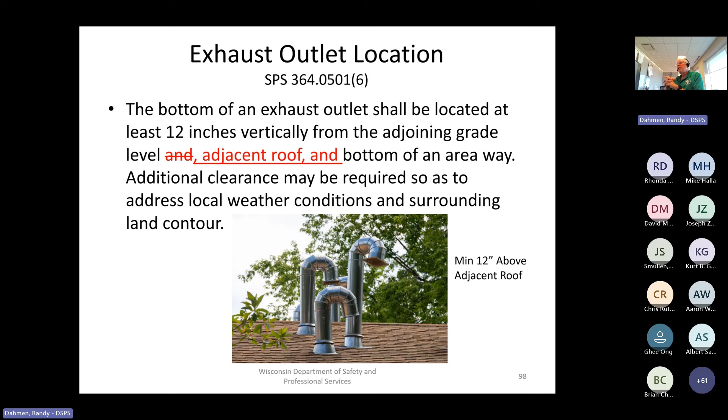Under the 2015 code and previous codes, we exempted the minimum exhaust requirements for a Type 2 hood used above a dishwashing appliance. We've removed that amendment. So if your dishwashing appliance has hot water or steam, you need to exhaust it, and you need a Type 2 hood, if that's your choice, with at least 100 CFM per linear foot of hood length.

Now, in lieu of a Type 2 hood with exhaust, there's an exception under 5073, which allows the loads established from the dishwasher, the heat loads and moisture loads, to be addressed and incorporated into the HVAC system. That's up to the designer and needs to be identified on the plan so we know that's the means by which you're attempting to demonstrate code compliance. Don't assume we know that's your intent. We'll assume an exhaust hood is required unless you provide an explanation and appropriate calculations identifying that you're taking the exception.

HVAC community, please pay attention to these next 3 slides. This is very important. It's in place. Some of you may not be aware of it. Hopefully when you walk away, at least you can ask and be aware of the situation being presented. First off, in the gas code, plastic venting systems.

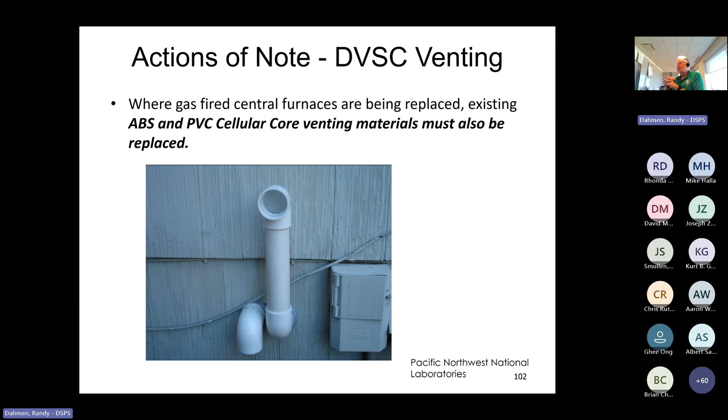So again, where gas-fired central furnaces are being replaced, existing ABS and PVC cellular core venting materials must also be replaced. Now, there was some testing done at the national level that justified that ABS and PVC cellular core were not viable as had been the initial intent, and that's the reason for the changes in the industry. So, a very important point for those of you who install, but also who replace HVAC equipment.

There are some new rules for smoke detection. These were driven by the Department of Health Services, based upon NFPA standard 90A. Now, in the building code for smoke detection system installation, we put the smoke detection on the return air side, because if there's smoke and fire in the building and there's return, it's going to go back through the return and trigger the smoke detection.

On the other hand, DHS looks at it very differently. Remember, these are hospitals and nursing homes. So they don't even want the dirty air to get into the building, so they put their smoke detection on the supply side. So if you're dealing with hospitals and nursing homes, and many of you may be aware of this issue, it's going to be codified here. Based on the rules at DHS and per NFPA standard 90A, which is adopted by DHS, section 4.2.4, for air handling units between 2,000 CFM and 15,000 CFM, supply duct smoke detection installation is required.

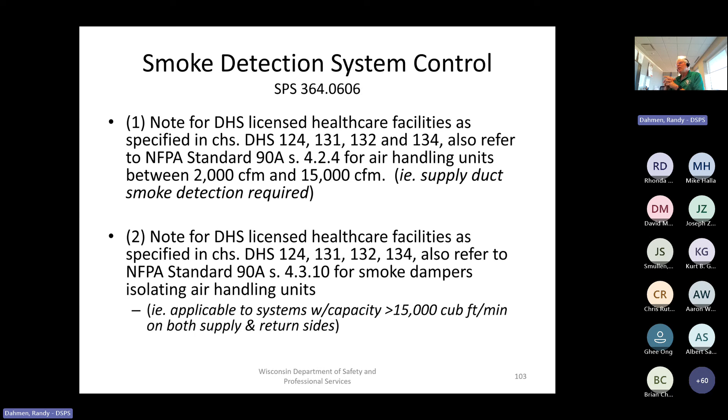DHS has additional rules that refer to NFPA standard 90A, section 4.3.10, for smoke dampers isolating air handling units. So the first question is, what does 4.3.10 mean? If you look it up, it's applicable to systems with a capacity greater than 15,000 cubic feet per minute, and smoke dampers are required on both the supply and return sides of the equipment, typically rooftop units. This is DHS rules we've incorporated into the building code so everyone's aware of some of the DHS requirements.

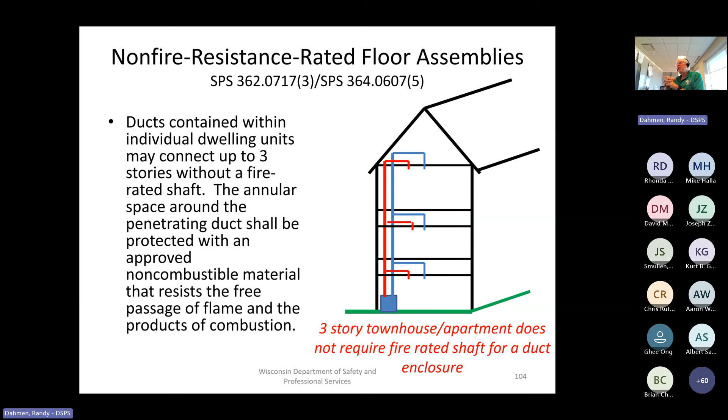We talked about this earlier. It's in both the building code and the mechanical code because it deals with a mechanical code issue. The building code is the primary reference for fire and smoke dampers, their installation, and fire-rated shafts. The mechanical code is a secondary reference, so we've put it in both the primary and secondary references for everybody to see.

Some reference standards have changed. NFPA 45, used for fire protection for laboratories using chemicals, has been updated to the 2019 version. And as noted, ventilation of healthcare facilities is now the 2017 version.

There were some changes made in the existing building code. The existing building code is applicable to those buildings constructed under the commercial code where you're now going to make a modification in some way—maybe a change of occupancy, change of use, an addition, an alteration, or even a repair. All of these are covered in the International Existing Building Code.

At present, our commercial building code does not require storm shelters. Designers may choose to design a building with a storm shelter using the requirements of the building code, but the rules as adopted don't require the design community to do that—it's by their choice. Given that, going to the existing building code, since we don't require a storm shelter in a new building, why would we require it in an existing building? So there is an exception.

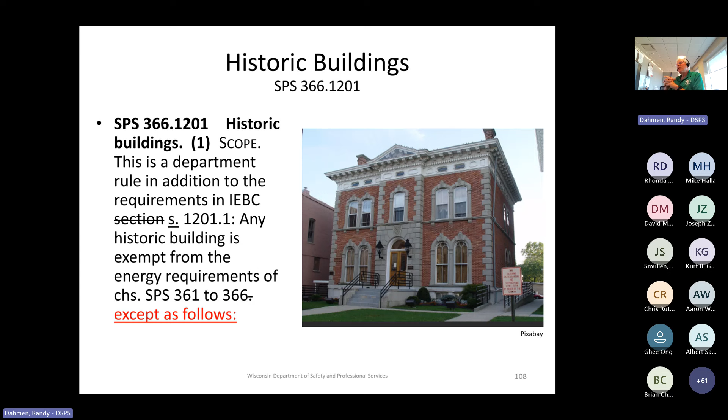So the next question is, well, now you're requiring me to meet energy code requirements—how am I supposed to maintain the aesthetics of this historic building? I think the committee did a pretty good job: if an existing ceiling, wall, or floor cavity is exposed during alterations, it needs to be filled with insulation. It doesn't say what kind or what R-value, just that it needs to be filled—it can't be hollow. And it's only required where it's exposed, so if you don't expose a wall, you don't have to insulate it.

Continuing on, all replacement skylights, windows, and door assemblies shall meet the minimum code requirements of the IECC. So if I'm going to take an old window out of a historic building, it's single pane, it's old, you have to meet the current code, unless specifically designed to address the unique aesthetics associated with the historic nature of the building.

Take a church, for example. It might have stained glass. That's unique, clearly not a listed, tested assembly. It was done on the fly 10, 50, 100, 110 years ago. If you replace that with new stained glass, or come back and modify it, maybe clean some of the glass or the lead used between the panes, we're not going to hold you to the current code for that glass in that historic building.

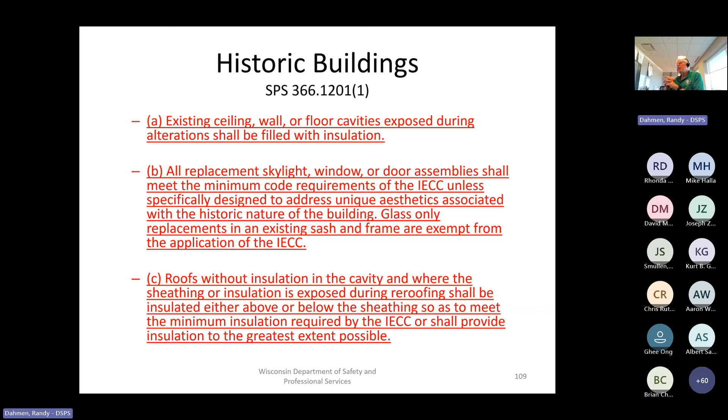Lastly, roofs without insulation in the cavity, where the sheathing or insulation is exposed during re-roofing, shall be insulated either above or below the sheathing so as to meet the minimum insulation required by the IECC, or shall provide insulation to the greatest extent possible. So if you can't get 12 inches of insulation up there and can only get 8, you put in 8. If you only have 4 inches for that roof for whatever reason, then you only get 4. But it needs to be filled if it's exposed.

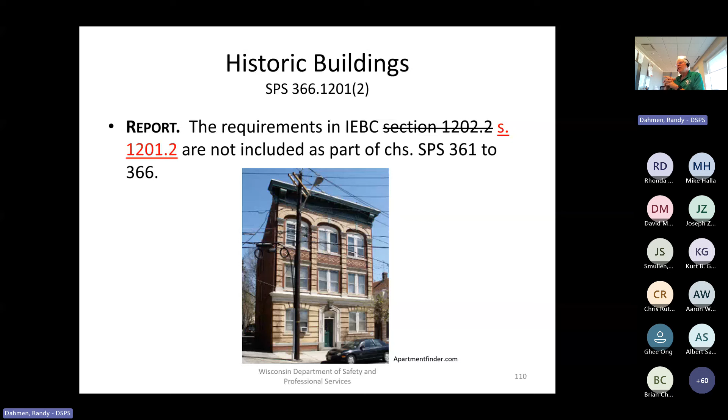Again, reports for historic buildings are not part of this building code requirement. We've retained that, so FYI.

Now you've seen the amendments. You're probably digesting them at this point. I'll let you think about that for a bit, but I do want to point out some points here that will be of value to you as we move forward.

As you get to the site, click on the left, click on iCodes, then to the right click on 2021 codes, and then view all the codes associated for that year. For those who like to look at old codes and what language might have changed, you can go to the same site and find other years. So if you want to go back to the 2000 code, you can click on it and see it right online. This is a really handy website.

Now, on September 1st, the final version of the Wisconsin amendments will be online. We do not have them any sooner than that, so don't call me, send letters, etc. The department does not control this—this is the Legislative Reference Bureau, LRB. They are in control of it and will release it when they deem it appropriate, typically on the day of release, which would be September 1st. So the amendments will be available then.